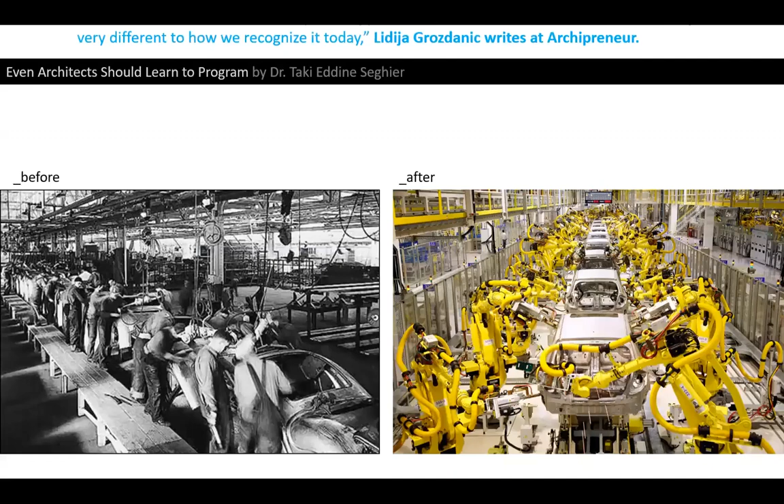And actually, sometimes people think that architecture, as we know it, is likely to disappear, and in the future the role of the architect may be very different from how we recognize it today. Which means we really need to find or update our toolkits in order to be up to date with current technologies. If we see, for example, the car industry - look at how it was before, and look at how it is now.

So basically robots have invaded the factories, and as you can see, we almost cannot see any person here in the current situation in the car industry.

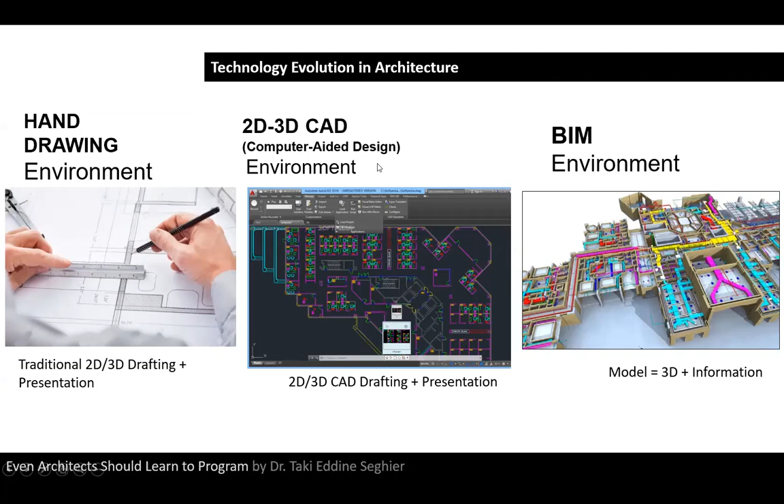Same thing now if we see what is happening in architecture. For example, we started by hand drawings - this is how things looked like - and then AutoCAD, 2D and 3D. And today everybody is talking about BIM, Building Information Modeling. The big difference between, for example, a BIM environment and CAD is information. This means if you have the weapon or the tool to manage this information, you will survive.

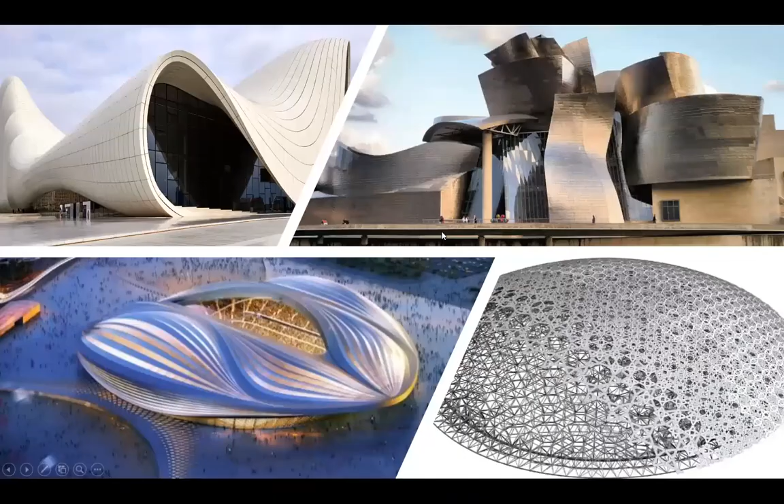All the surroundings, whether it's a robot, video games, or even your air conditioner in your current room, there is always programming. There is a place for everything in nowadays life. Even for architecture, these buildings would never be standing like this, like in these pictures, without programming. So there is always a space where you can apply programming, even in the design process.

This is what we will focus on after that. So I believe if I ask you what architect you would like to be in the future, many would say this guy, Le Corbusier, because he's very known as a very good architect. This is maybe before, but nowadays you have to be like this too. The second half is Bill Gates. So basically you need to think like Bill Gates also. You need these two persons.

So the Corbusier mind in order to think about how to design and everything related to architecture, but in order to embrace the current technologies, you have to think also like this guy, Bill Gates.

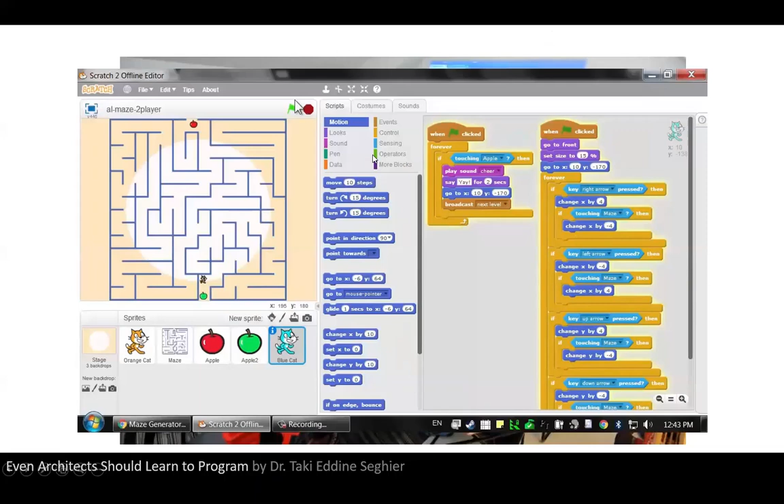Which means it's not only for architects. That's why in some schools you can see kids learning programming. Just for your information, there is already a software called Scratch, developed by MIT, oriented for children to learn programming.

For example, this is a small program developed by a kid. As you can see, the mission is to move this small cat from this green apple to this red apple. So they should develop an algorithm to make this happen, to reach the objective.

Another argument for why programming is important: there is a survey done by Stack Overflow, a very well-known company. They did a survey of 26,000 developers in computer science, and these persons come from 157 countries.

One of the findings: 48% of them are self-taught and without a computer science degree. This is very important. This means if you are an architect and I ask you to learn programming, I'm not asking you to go take a degree in the University of Computer Science.

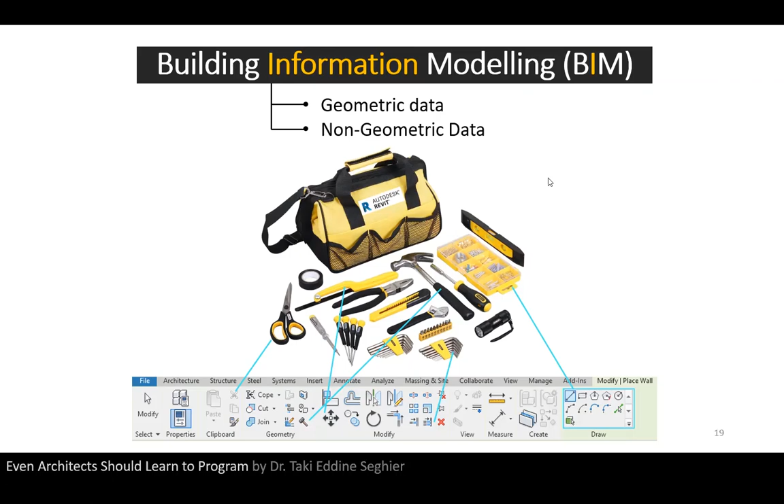It's also important to know the difference between information and data, because it's a bit confusing. We cannot use them interchangeably.

The main difference is that we have data, and in order to get information, you have to process the data. Now how do you process the data? I have an example of what we mean by processing data. For instance, from A in order to go to B, we have data, which is paddy rice, and we want to get information. So basically we need to go through a process.

In the beginning we have paddy rice, we process it through dehusking and parboiling. From husking we get brown rice, then milling, and then white rice. All this process, since it is a process, we call it in computer science an algorithm. So now you know what algorithm means: basically it's a series of instructions that we give to a computer. We have data, and we have objectives in order to get useful data, which is information. So this is what an algorithm is, and now you know the difference between data and information.

In other words, let's say we got that information, which is rice. We can go through another process, apply another algorithm. We take this input, add carrot and other vegetables, slice them, filter out things we don't need, and put them in this cooking recipient, adding variables, even salt, and in the end we get an output which we can eat. So now we've applied an algorithm. This is an algorithm - I know sometimes students get scared when you say algorithm, thinking you're talking about rocket science, but an algorithm is a very simple thing: a series of instructions that we give to the computer.

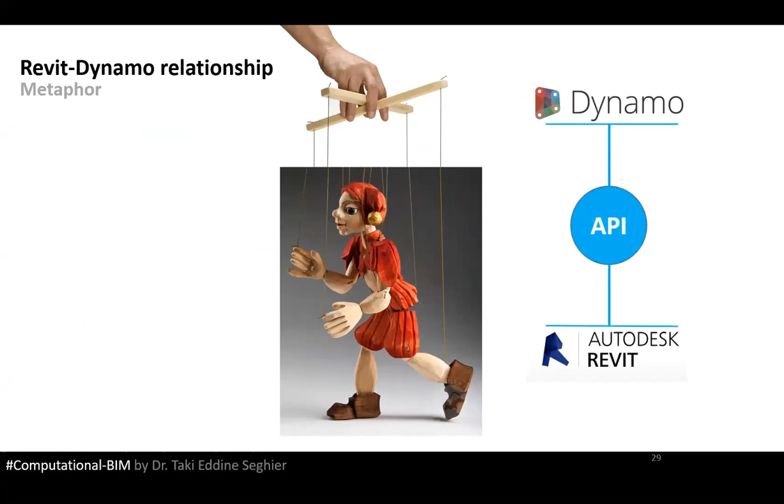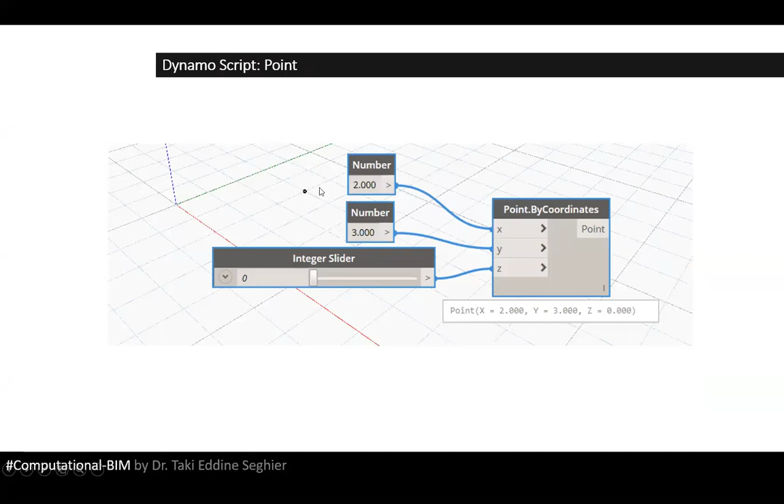Remember, this Dynamo is connected with Revit. So this means anything you do in Dynamo will happen in Revit also.

So this is another example, just a Dynamo script which will create a line for you. These are very basic things, of course. A line needs minimum 2 points, so we call it line by start point, end point. We have start point here and end point here. We call it point by coordinates here and here. And as you can see now, these points have been created.

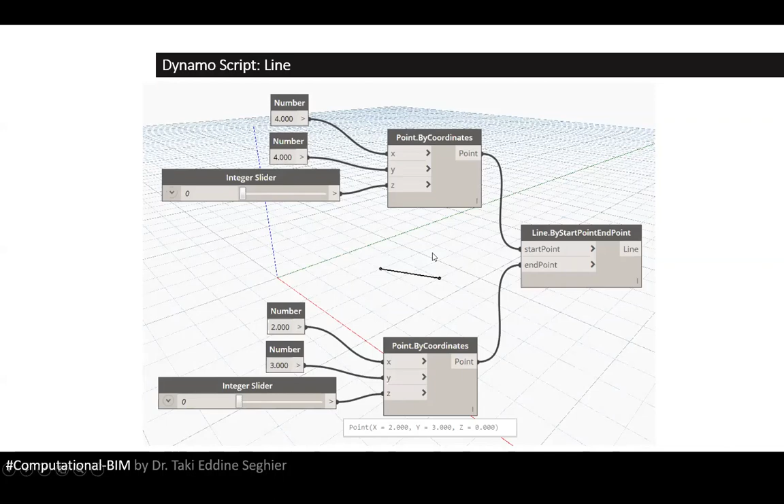If I change the Z, for example, you will see this point go up. Basically, this is how programming works. Even in Grasshopper, it's the same concept actually.

Now, before I start showing you the examples or case studies of how to apply this in architecture, in your projects, I will make sure that you know the advantages. By using programming, either visual programming or text-based programming, we can automate repetitive tasks. For example, if you go to the industry and start using Revit, you will see many tasks are very boring. You spend too much time doing them, and it's like you are repeating it. So you start thinking, why can't we develop something so I can click once and everything will be done, instead of keeping on renaming and all these kinds of issues.

Programming also helps you create design options, many design options. In design studio, usually you just create one design and take it to your lecturer and tell him this is what I did. But possibly it's not the best design option. There is a high chance it's not the best option you have selected, because there are thousands or unlimited options of material, unlimited options of shades, maybe orientation also, many options. So it's really hard as a human being to select options like this. We need this kind of programming.

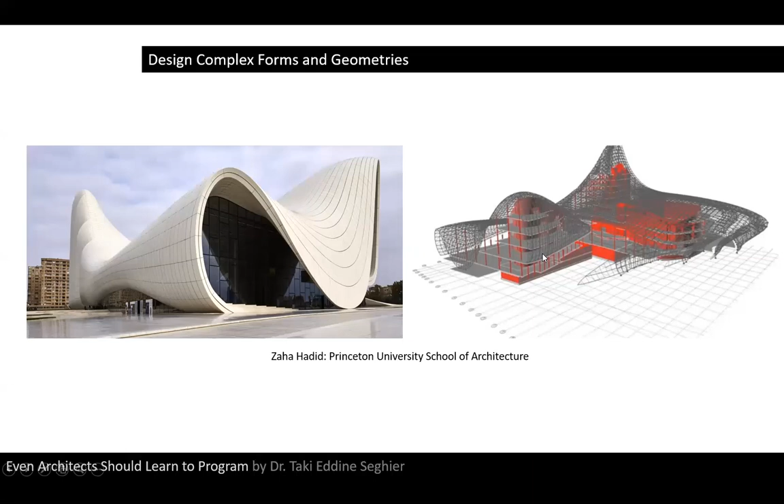We need to know the coordination of each panel. As you can see here, they are very curvilinear geometry. So if you come to build this kind of structure, you will find it very challenging. Without programming tools, you will not be able to make it.

Another application of programming: usually we need to simulate what we call a kinetic or dynamic facade, simulating its movement and how it adapts. I think you know this project, Al-Bahr Towers in Dubai, where the facade opens and closes depending on the sun position and the thermal comfort inside the building.

There are sensors connected with the pattern in the facade, which will open and close depending on variables like thermal temperature inside and solar radiation. So if the sun is behind, it's okay, we can open it. The sensor can detect there is no sun, so it will be open.

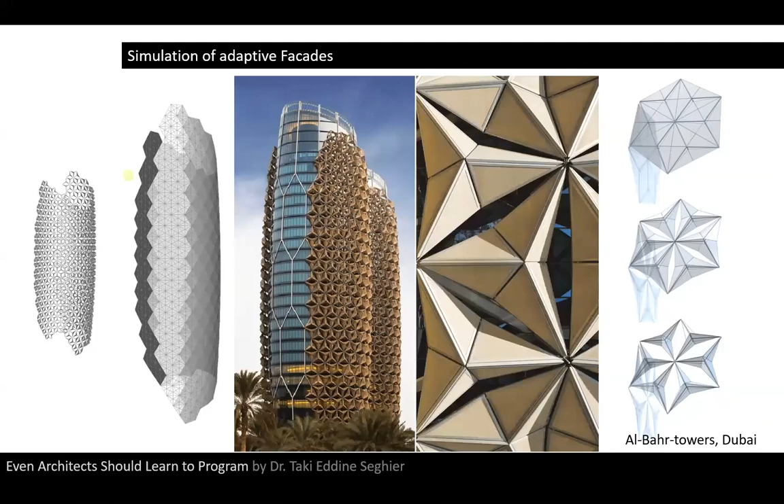These kinds of things we need to model. If we are in the design stage, we have to model them using computer software and simulate this movement. We can do it actually using Revit and Dynamo. There is a whole workflow, and there are videos on YouTube on how to model these adaptive facades.

You can connect the position of the sun with the movement, whether it opens or closes, as you can see here. So it's like we do a simulation. If you bring this to your lecturer and show him, look, when the sun is here, it will close, it will be a very good argument in your design studio.

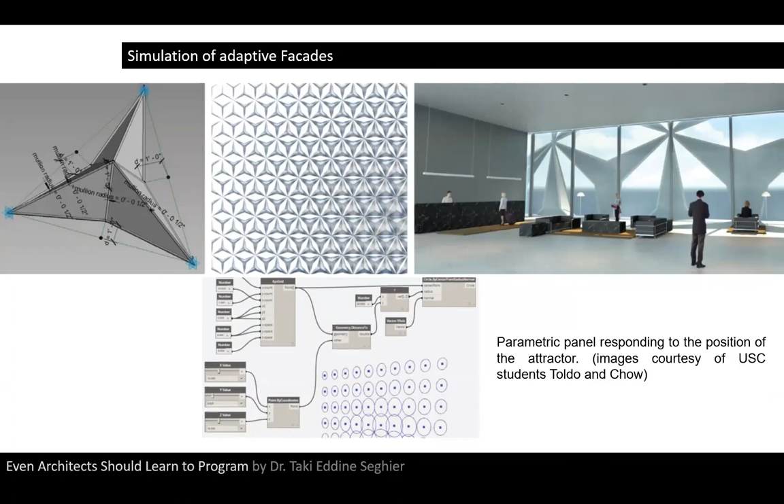It's not just saying, look, the sun is here, and I designed my pattern to be closed and open, without bringing enough proof. But if you simulate it, it's a really strong argument for your design.

Another important thing we can do using these tools is generate what we call random patterns. Nowadays we have many projects with randomized patterns in the facade, like this one, or this tall building with these white panels. They are random, and there are good workflows in programming to make these randomized patterns, so you can test many patterns.

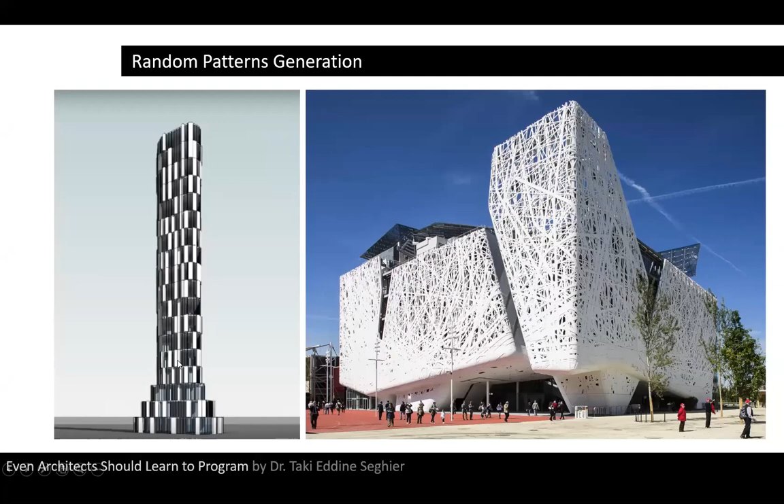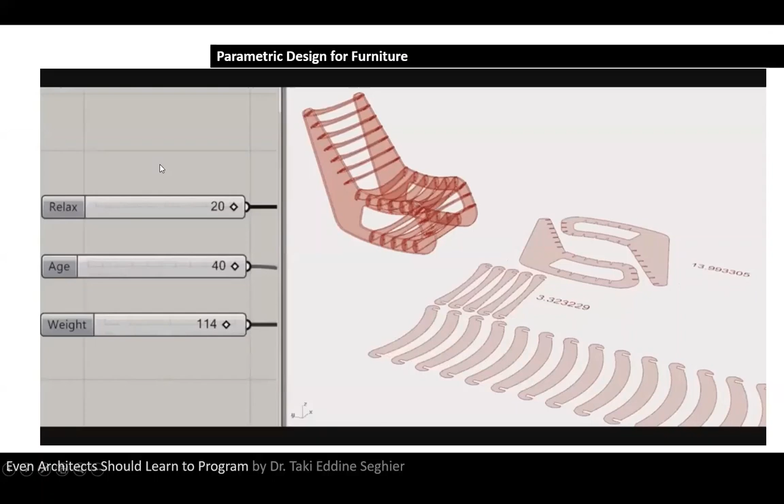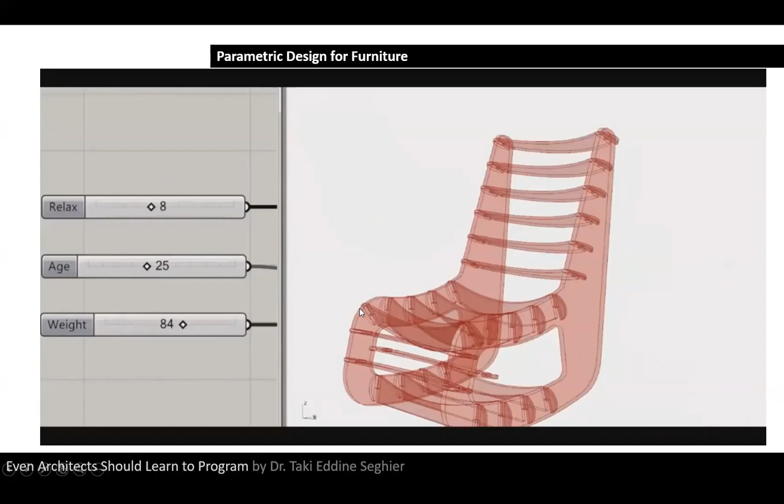It's also very good to use these tools for parametric modeling, like here in Grasshopper. For example, this is for furniture, but we can apply it also for a building. As you can see, we created parameters such as relax, age, and weight. Since things are parametric, we can experience different options of this design.

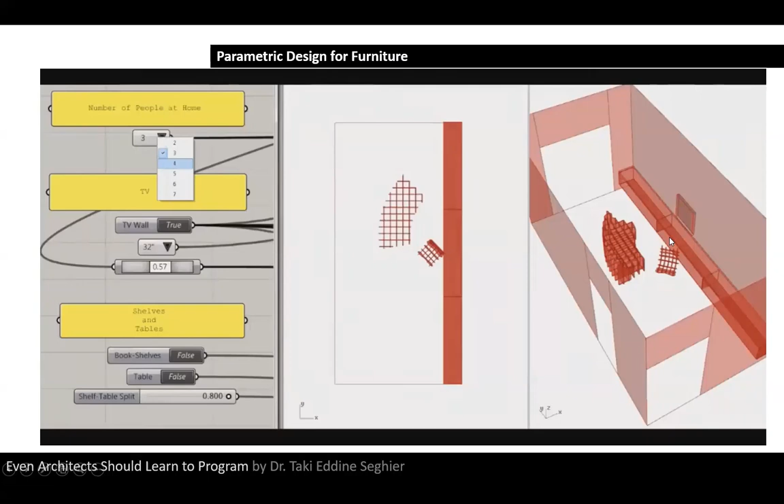This is another example, a room. If things are parametric, they should also be objective. Here we don't have much space, so we're trying to select the optimum size of the furniture.

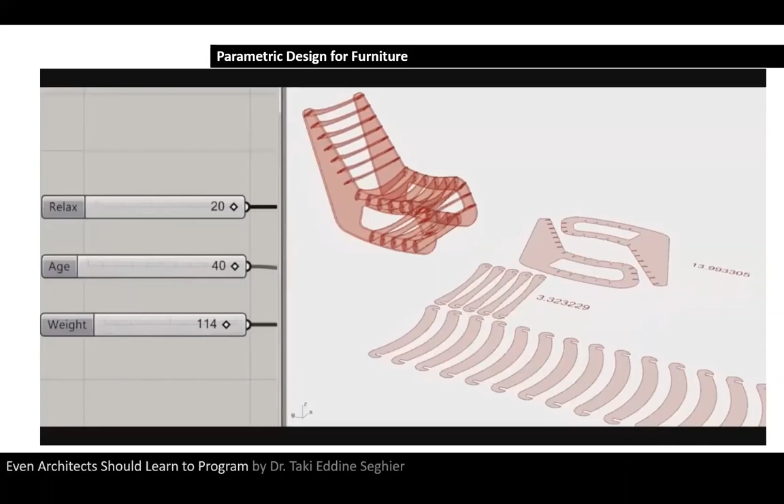Of course, for structural design as well, as you can see, this one is Revit, and this structure has been designed or modeled using Dynamo. It helps a lot. Same thing here, we have structures also.

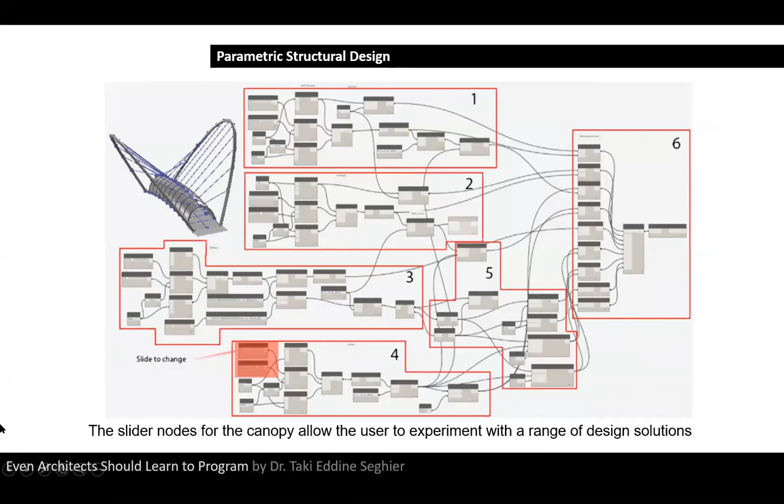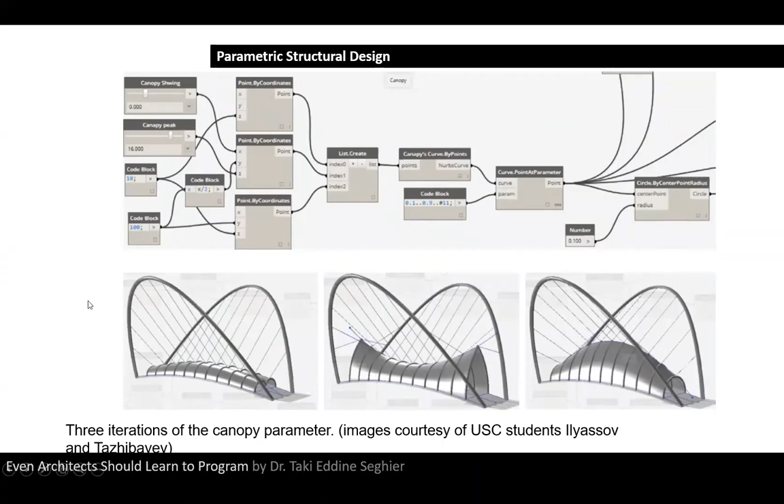It's a parametric structure, which means we can experiment with many shapes, testing different kinds of shapes depending on the parameters we've selected, where the structure will be able to move. As you can see, it's the same structure, but here there's a variable we can move and see if it is interesting or not, depending on our objectives.

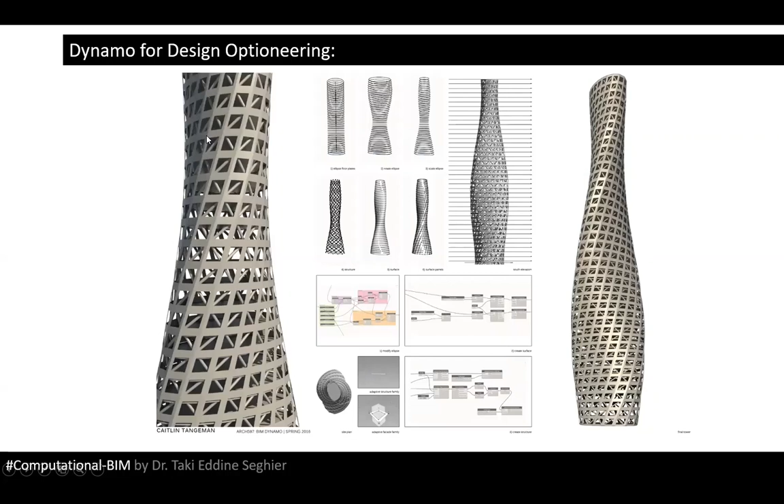Same story. This one is related to structural designs, and we're trying to create different options using visual programming software. Of course, we can do this using text-based programming, but architects are usually encouraged to use visual programming, especially in the beginning, because text-based programming is a little bit complicated. Visual programming is more friendly for the user.

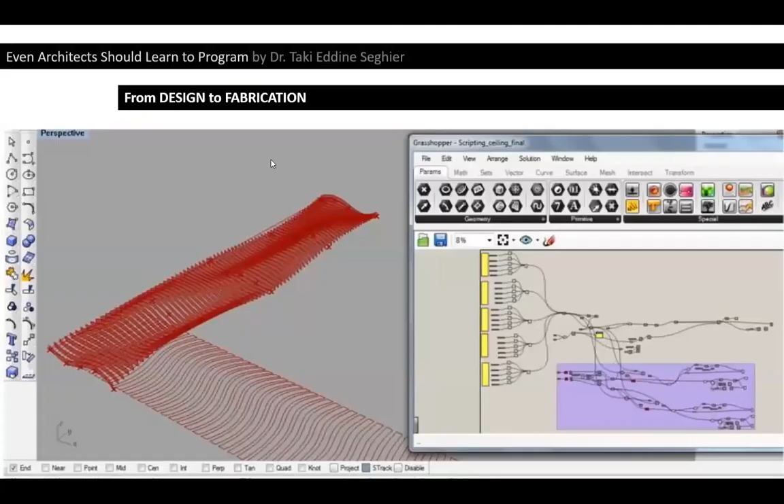Another thing, it helps for fabrication. For example, this kind of ceiling, which is a sculpture connected to the ceiling, is real here. They made it using Rhinoceros, and as you can see, this is Grasshopper, the script which modeled it.

So the advantage when we model it using Grasshopper is that we get this curvilinear result, as you can see. Almost no element is similar to the other. They are very different, which means when we come to produce this, if you do it in SketchUp, we'll find difficulties cutting, slicing, and manufacturing them.

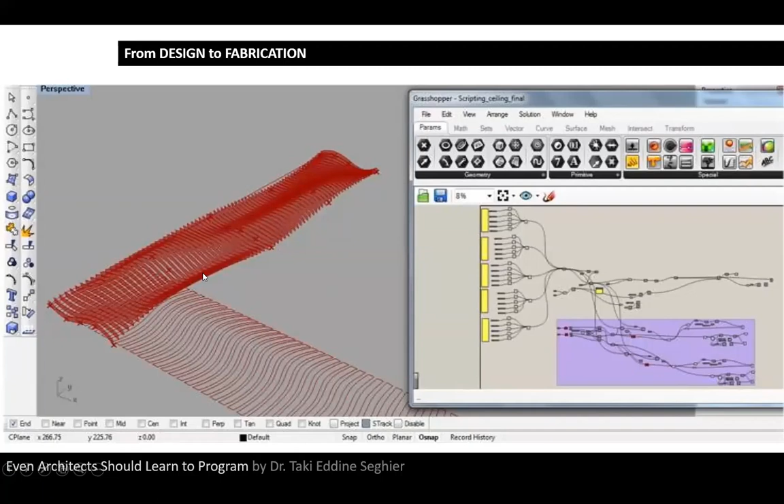But when we use visual programming like Grasshopper, we will be able to get exact measurements and an ID for each element, ready to be printed or cut. After that, we just need to install them very precisely, and we'll get the good result we were hoping to see.

His project is a big one, an arena. He has auditoriums, and his idea was that these seatings should rotate. We should not make two separate seatings, one for the arena and one for the auditorium. Since they play basketball on weekends, the seating will be one way; if other days they need the auditorium, they can rotate.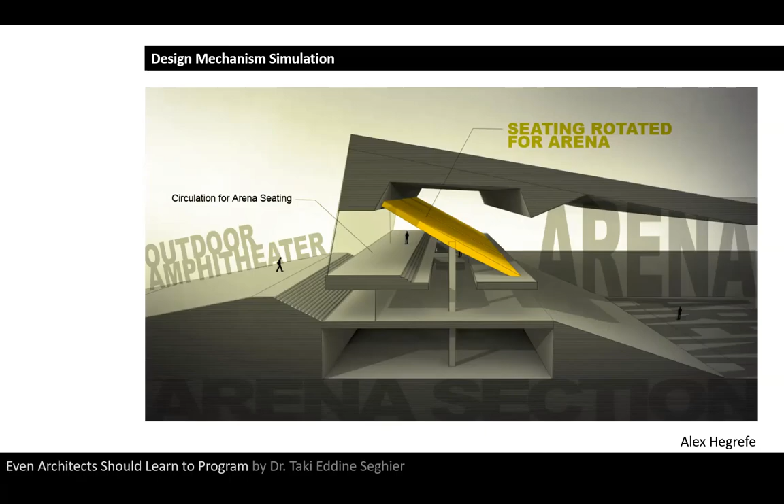Now, if you don't know programming, you will stop here and not go deeper into your idea. But when you know programming, you will be able to simulate the mechanism of your seating, as proposed. He's explaining the structure here, different components, and how the mechanism will rotate to make it possible, as you can see rotated this way.

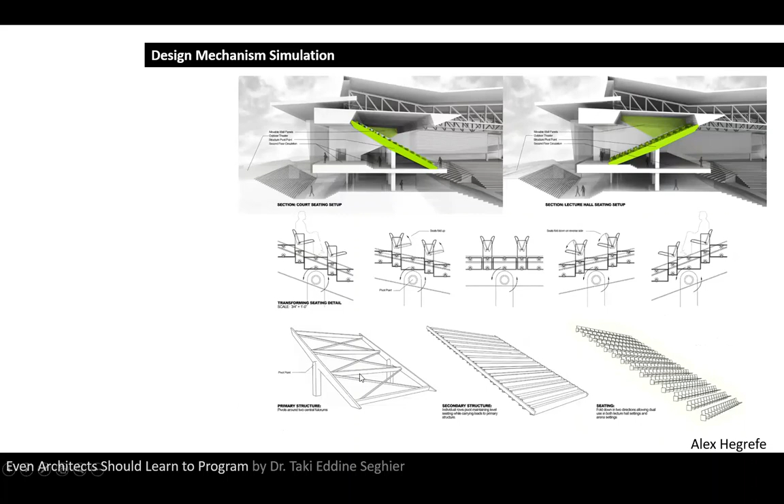And of course, there is a script. He's showing that things are precise, not just artistic. If you zoom here, you will see the rotation because it's a variable, it's parametric. So as you start moving the slider here, you will see that the seatings are moving, rotating.

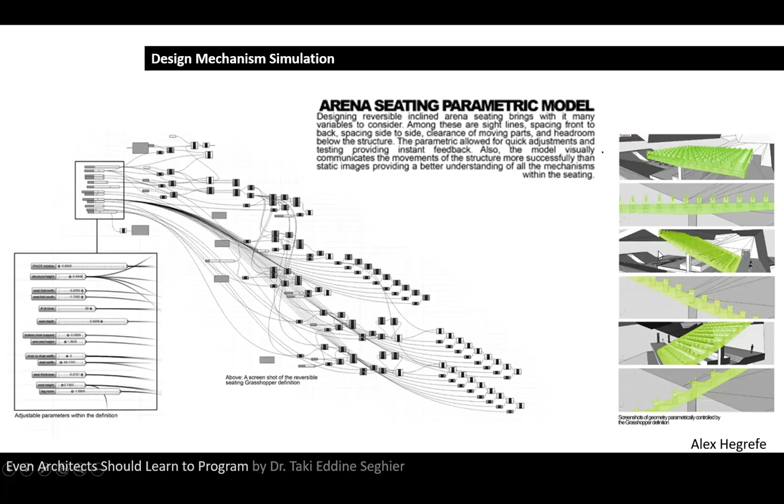This is the same student's work. For example, here he has a louver system in the facade, and it's going along a very long facade, covering it. But the issue is that this louver sometimes covers a corridor, sometimes a cafeteria, sometimes an auditorium, another cafeteria.

His idea was to protect the spaces and design his louver depending on the solar radiation and the function of the space, because we don't need solar radiation in the auditorium, for example. We need it here, maybe it's okay since it's a corridor, but not here. So we need an idea to make a complete louver parametrically, where we can experience changing the openings of the louver system.

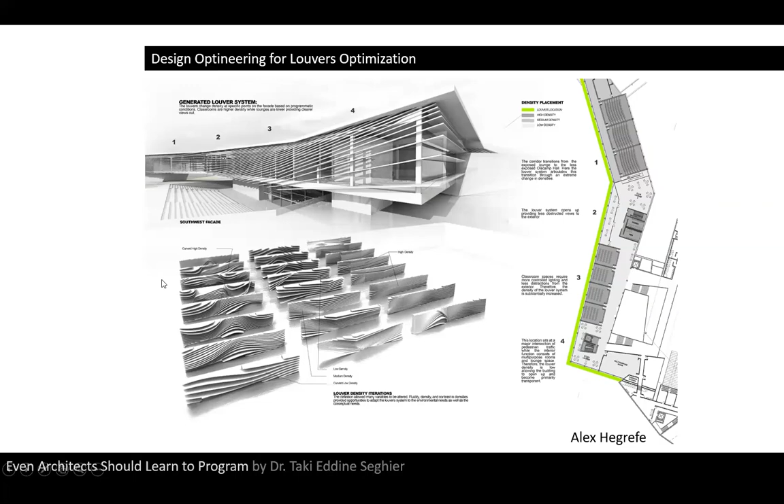As you can see, he has created many patterns of this louver system, and he used Grasshopper, a visual programming tool. The process here uses what they call an attractor point, but no need to go through the details for now.

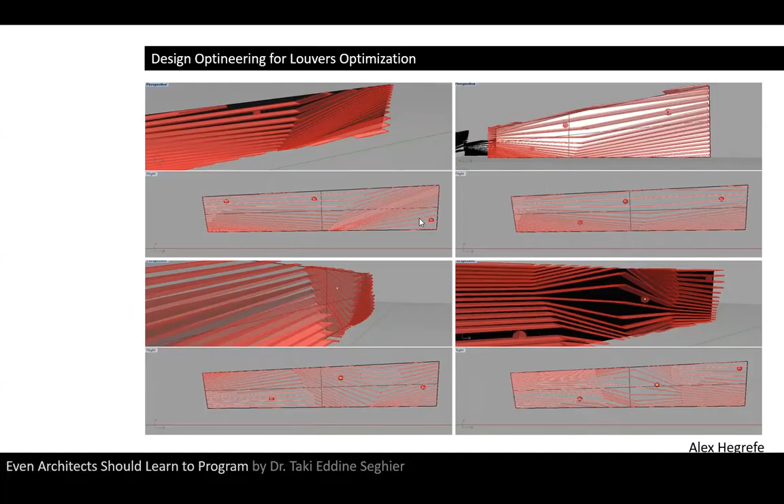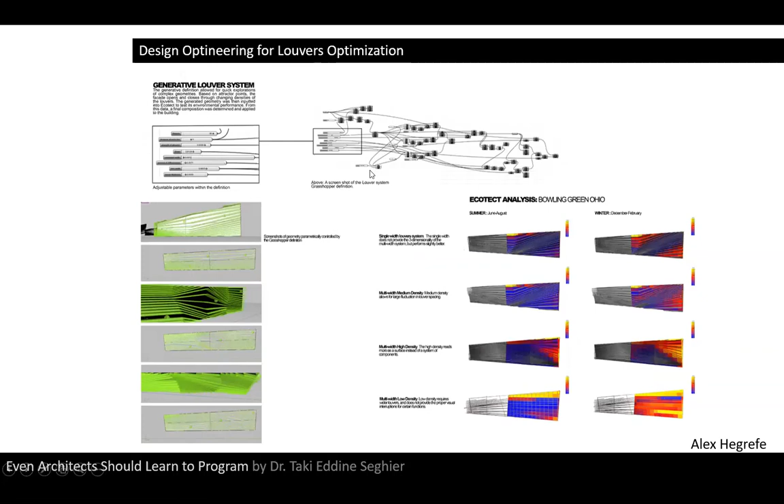Since Grasshopper can be connected to Ecotect, a simulation software for environmental design, he was able to perform radiation simulations for each elevation, and see if the radiation is too high or too low in some areas. So he has a kind of rational thinking to argue about his design using this technology. By the way, he got the best project among his student semester or year.

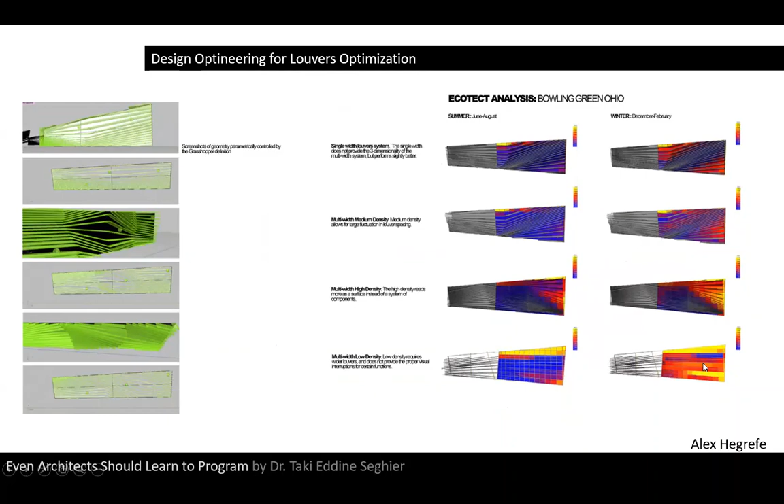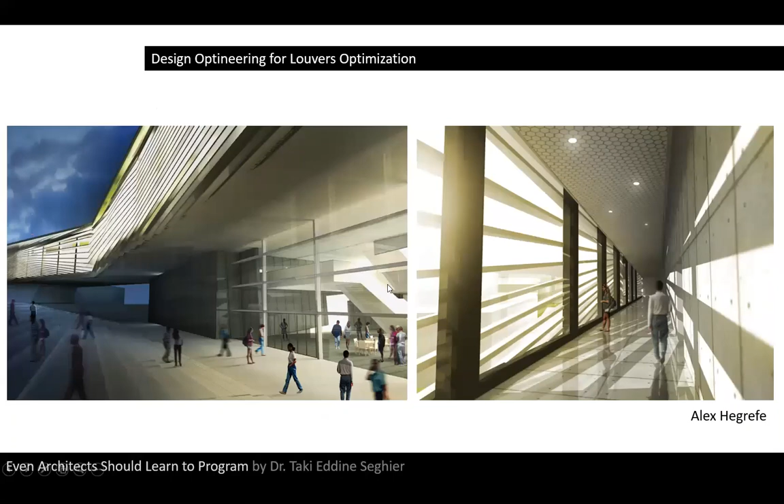So this is continued. He did Ecotect analysis for summer and winter, as you can see here, regarding the radiation for each pattern. And this is the end of his rendering. After that, he selected the best one, which is normally this kind of pattern. He has strong arguments why this is the best one, not just selecting and drawing. He has arguments even about the selection of the louver, and of course, thanks to programming, otherwise he would not be able to get this kind of results and workflow.

This is another script developed by another student. This script is meant to optimize thermal and daylighting of the interior space. As you can see, there are many kinds of what we call nodes, these ones. So the objective is to optimize, as I mentioned, the complex thermal and daylighting.

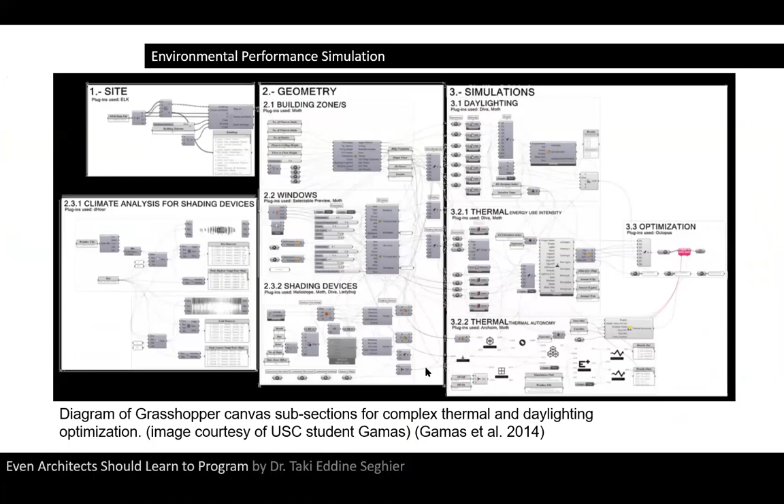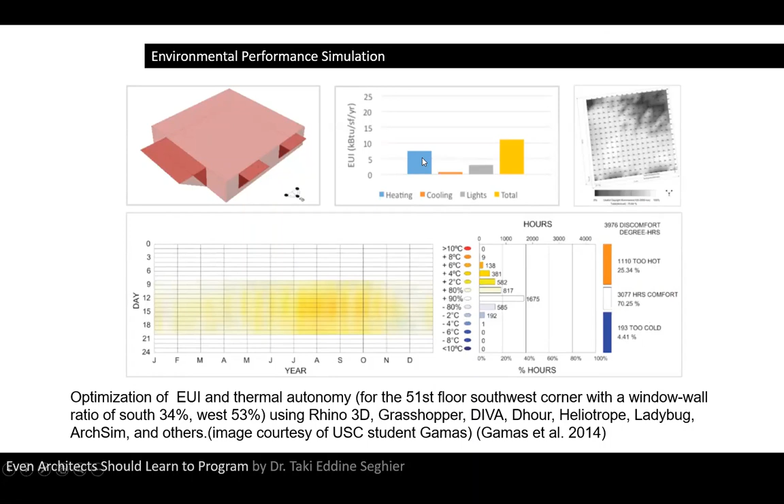Okay, this is another example. It has been done using Grasshopper. It's the optimization of EUI, which is energy use intensity, and thermal autonomy. They use this visual programming to optimize these. As you can see, you can get results, and after that you can draw a diagram of the performance of the building. All these results are actually coming from this visual programming tools.

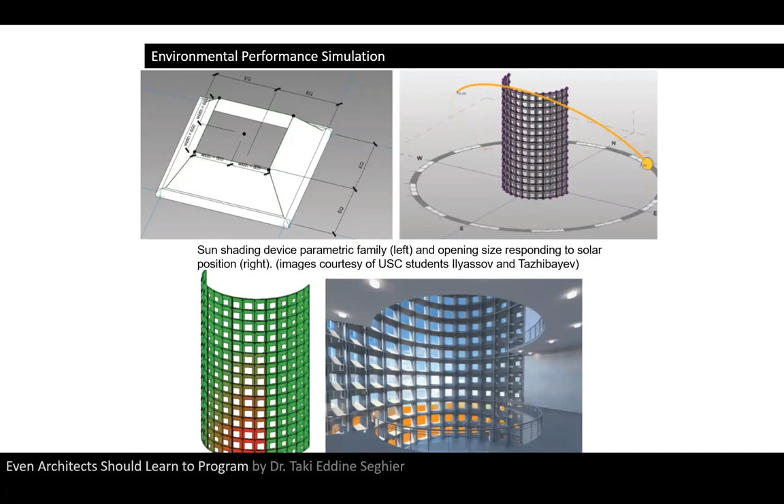This is another example where we use Revit and Dynamo. We developed a kind of pattern for the facade, and we repeated the pattern. This pattern, since there is the sun, should open and close depending on the position of the sun. As you can see here, it's open a little bit, and here it's more open, maybe because the sun is on the other side. So it's important to do simulation. When you have an idea, especially related to dynamic facades, you need to approve it. Maybe you will not need to develop a physical model, but digitally you can approve it. You can do simulation for the mechanism.

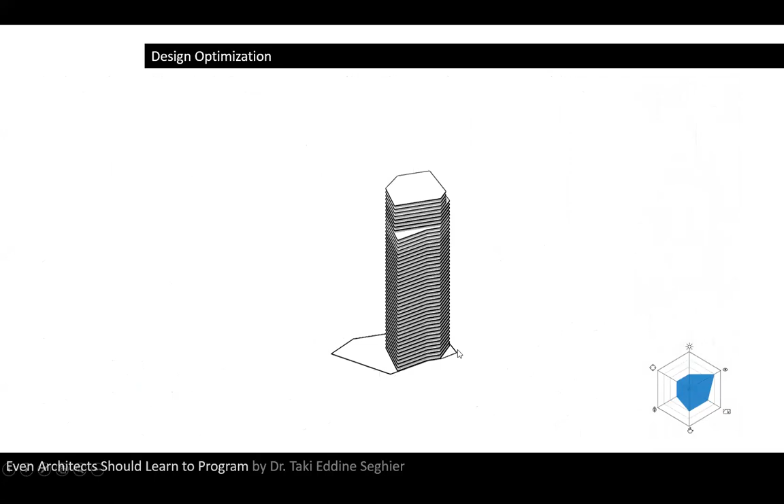Nowadays there's what you call optimization. In optimization, we use algorithms, and there are many sophisticated algorithms, until we can just give some data to the software, to the algorithm, and the software and algorithm will give you the best design in terms of, for example, daylighting, or cost, or both cost and daylighting, and even energy. And you will see something like this. Because your initial model is parametric, when you run the software, it will test each possibility or option, and in the end it will show you, look, this is the best option, because it doesn't cost too much, and regarding daylighting it will be perfect, and maybe even the energy consumption will be very low. So you have to select this option.

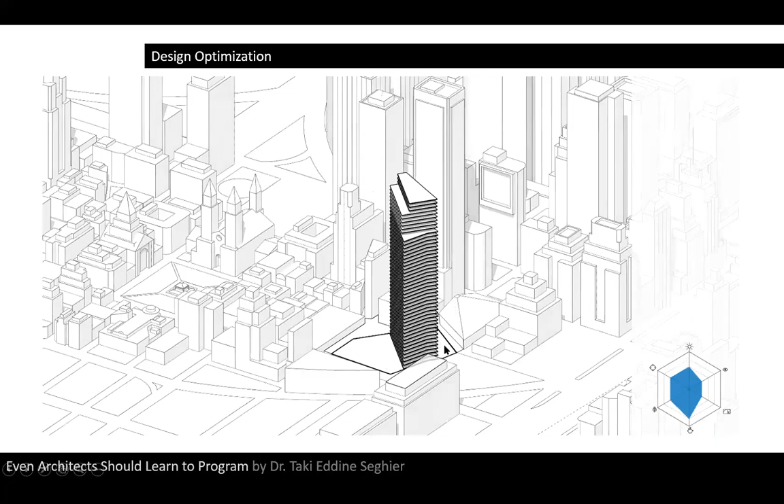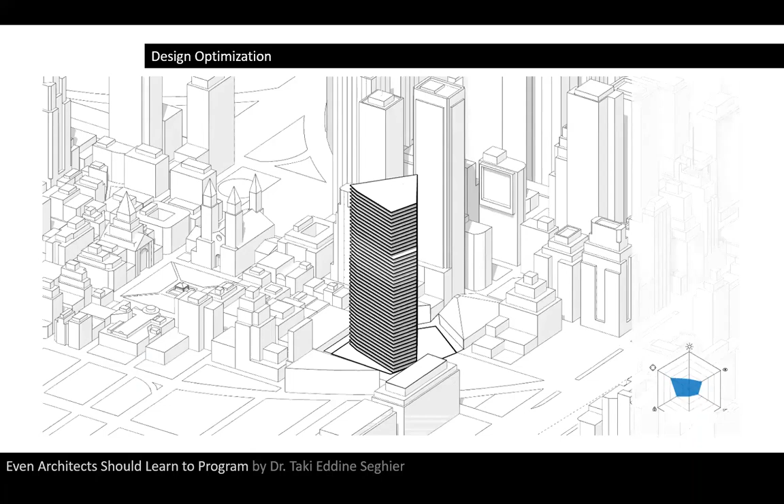So as you can see, digital developments are really, sometimes they are even scary, because you may think maybe we will not even need architects to do this, because software can take decisions better than us. They can test many options and give you the best one. But anyway, this is another discussion.

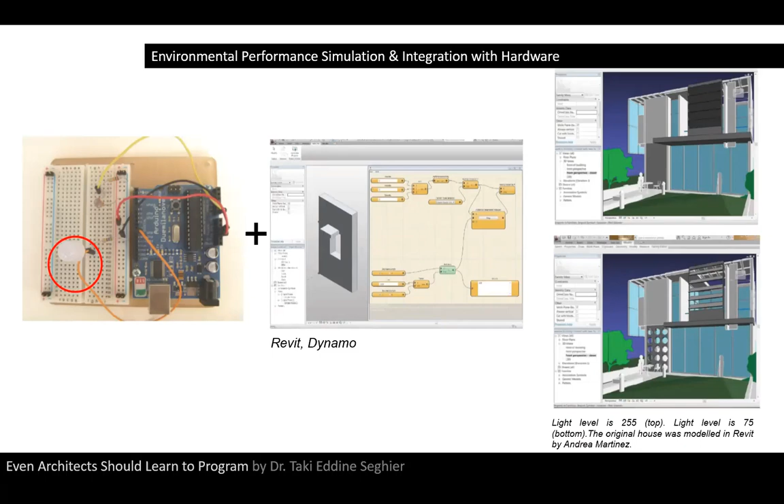One of the very advanced exercises we can use through visual programming: nowadays we can integrate hardware with visual programming. For example, this is Dynamo. Let's say we have a window and a shading device, and this shading device can move, or this opening, as you can see here, is closed and here it's open. Same thing for this louver. There will be a sensor, as you can see here. We call this Arduino, and this Arduino is connected to the Dynamo script that you have developed. For example, when you put your hand on this sensor, which is for lighting, you will see on your computer that they have opened, because they are all connected. So even though the hardware is realistic, under your hand, you will see that when you cover the sensor, these louvers will open. It's like you are giving instructions to the computer from the hardware. So it's very important to know that we can do this even nowadays.

Now I will try to go quickly through some other case studies. Now I will talk about the benefit of Dynamo for data management and automation. Maybe you will not feel the importance of this part until you go into industry and face too many issues when using Revit. You will see many things that are repetitive, and you will see that you are wasting your time.

So perhaps you will need to use Dynamo for this. For example, let's say you have this issue: I ask you the number of the room by floor level. Because now if I see the numbering of this 2D floor, it's saying 08A, 08, and 07.

I ask you, can you make the numbering of the room by floor level and room name? If I give you a table like this, I ask that each room in level 1 should contain a room number like 101, meaning level 1 and room 01, level 1 and room 02. And I give you this, the level 1 current naming.

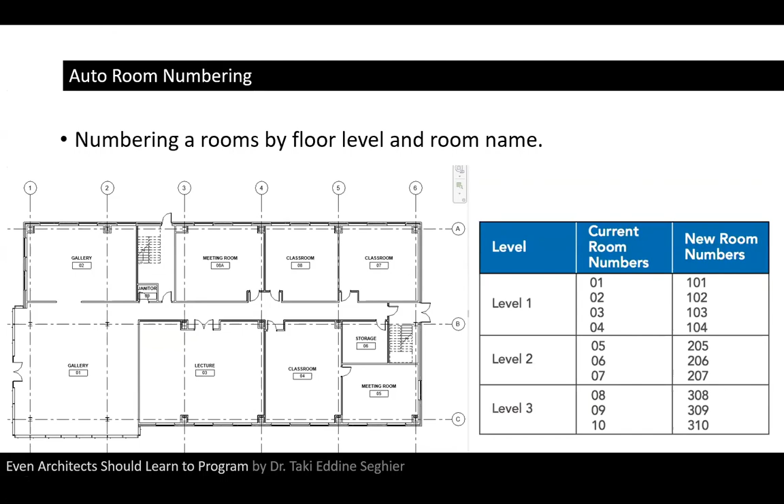As you can see, if you don't use Dynamo, you will go through this naming one by one. So where is room 1? You will make it room 101. 102, you will make it this one, and so on. But if you have Dynamo, you can develop a simple script which will do this in a blink of an eye. You just click and all the naming will be changed automatically. You may not need this currently while studying, but when you go to the industry, you will face this kind of issue, especially when there are too many rooms.

So this is what we call script logic flow. We can apply this to solve that problem. Basically it works like this: we ask Dynamo to gather all room elements, read each room's level name and room number, gather the last character of the level name, join the level number and room number, and write this information back to the room. So this is the script, or algorithm, as I mentioned - an instruction that we give to Revit through Dynamo.

So sometimes, for example, if I give you this project and ask you to rotate these seats 90 degrees, what would you do? If you select all of them and click rotate in Revit, actually all the seats will rotate not on their own axis, but on a specific point. For example, if I click here as the point they rotate around, maybe they will end up outside of the room.

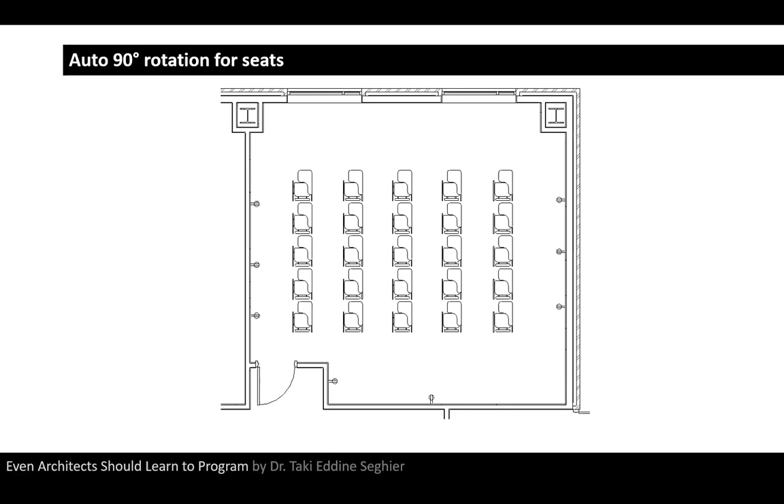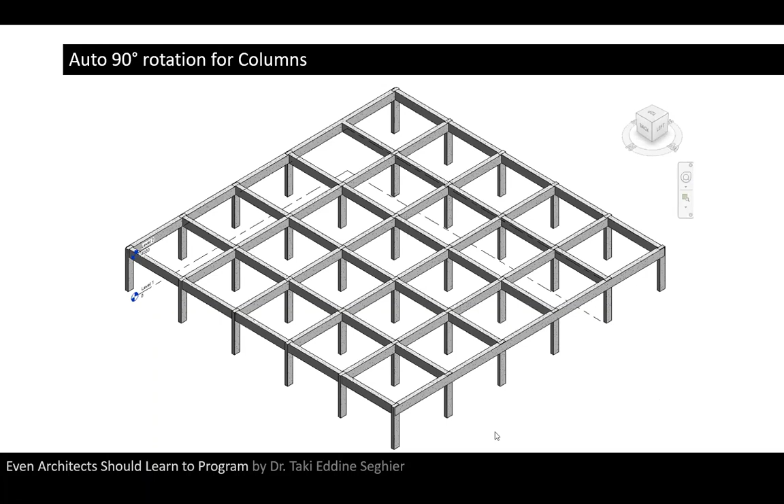So to make this happen properly, we need to develop scripts using Dynamo, and in a blink of an eye we can execute it and see all the seats turned 90 degrees in a few seconds. Same thing with these columns - if I ask you to rotate them using Revit only, you'd have to rotate them one by one, which is time consuming. Imagine you have hundreds or thousands of these columns - it's really time wasting. But if you know how to do programming, you develop a small script, click, and you'll see them rotated automatically.

For example, this is another kind of issue you may face: the International Building Code defines the occupant load as the total number of persons that might occupy a building or portion of it at one time. So the equation is: occupant load equals room area divided by occupant load factor.

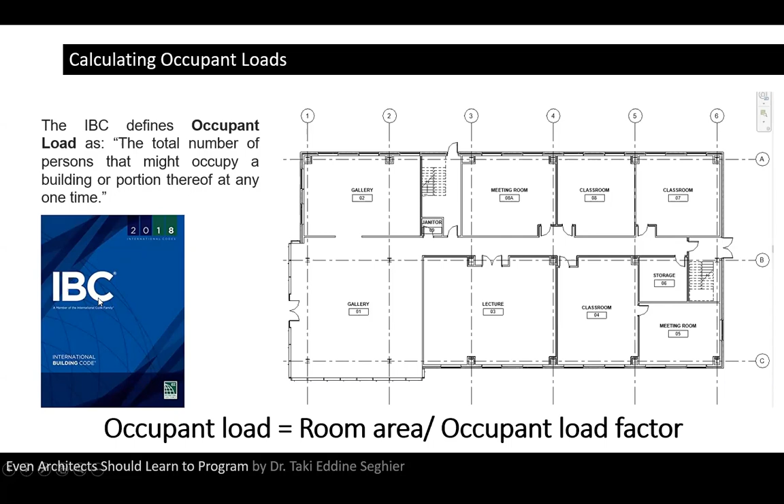This information is already inside the rooms in Revit. If you select a room, you will find this information. So since the code asks you to calculate it, you can develop a small script like this one to calculate it. When you execute it using Dynamo, you automatically get the results, and you won't waste time each time you have a new project - you can always use the same script.

Of course, as I mentioned, you will not face this kind of issue when you are studying. These issues happen when you go into practice - you will see them, especially when you are using Revit.

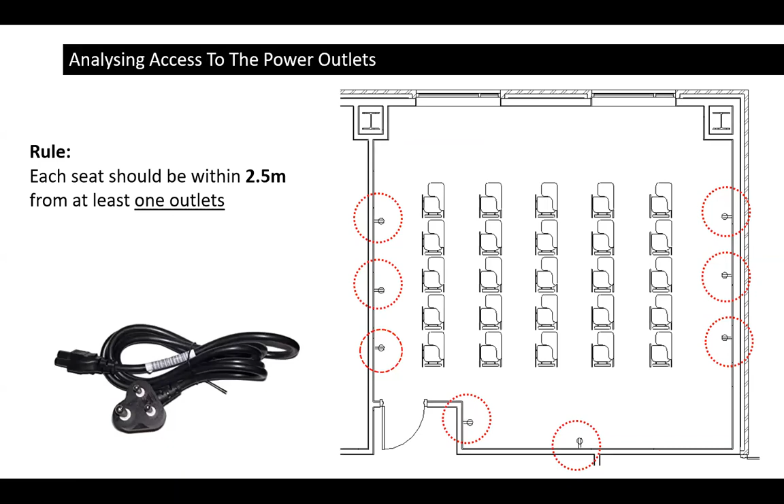Let's say, for example, if I give you this kind of floor plan and I ask you - it's like a small auditorium or class - and according to the standards, each seat should be within 2.5 meters from at least one outlet. How can you prove or make sure that this rule is applied? It's very hard to do manually. Maybe you'll just start assuming, but when it comes to regulation, there should be no assumption. Using Dynamo, there's a very good workflow for this. We can apply this workflow and check and make the seating which doesn't respect that rule show as red, for example. So you can develop your own software to help you.

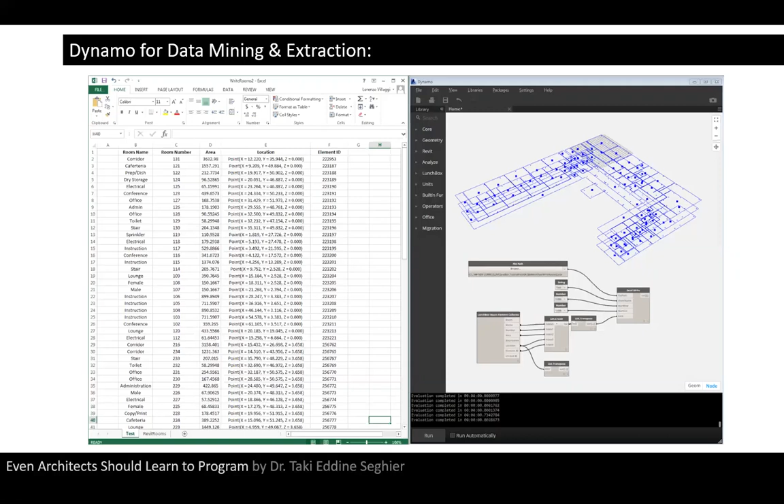Another thing we can use Dynamo for is what we call data mining and extraction. Because when we have a BIM model, there is too much information. Sometimes we need specific information, so we need to extract it. We can extract it using Dynamo if we wish, and of course send it to Excel and all these things. This is another example.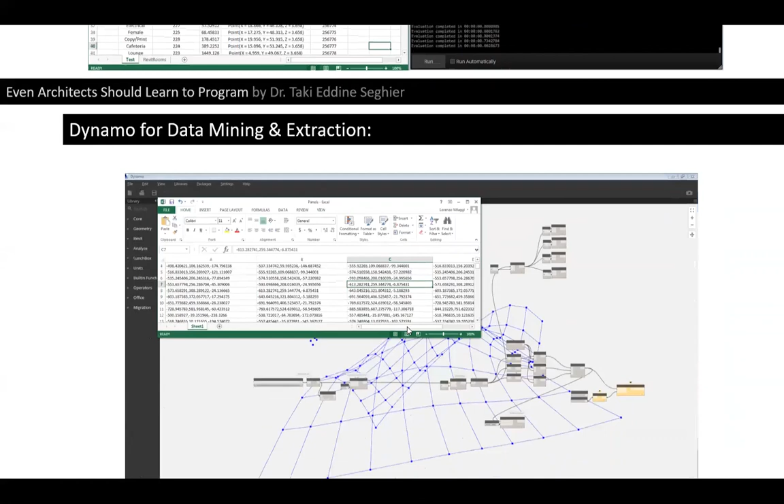Okay, so this is the last part - programming for architectural research. As I mentioned, this part is more for those who want maybe in the future to pursue a master's by research or PhD by research. The next slides are from my PhD thesis, and because I used Dynamo, I'll try to explain roughly. If you understand the big idea, that's already good enough.

So what we did in my PhD - one part of it - we developed a kind of tool using Dynamo scripting. I was in architecture, by the way, so I'm not a computer scientist - no, I'm just like you. So we developed a tool which is able to automate the assessment or calculation of something called OTTV, overall thermal transfer value.

Just briefly, overall thermal transfer value is like a metric we use to understand how much heat gain will enter the building through the whole building envelope.

That's it. And currently, they're not using Dynamo for this - they do the calculation manually, and there's too much paperwork. Sometimes it's complex, mistakes can happen, and every time, it's time consuming.

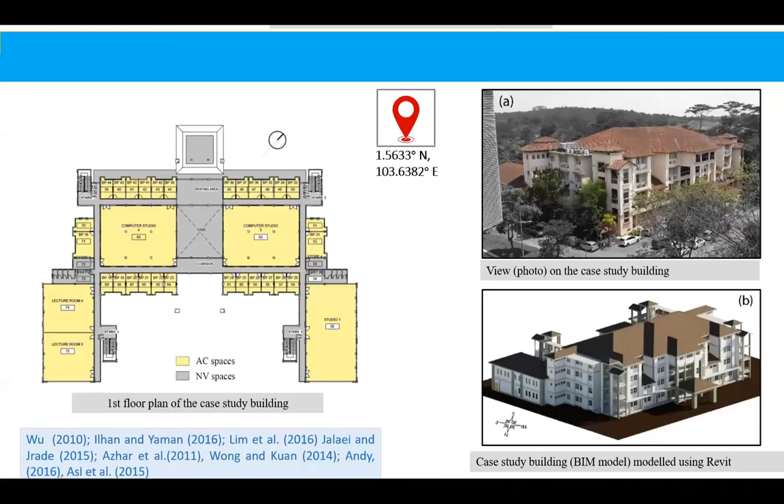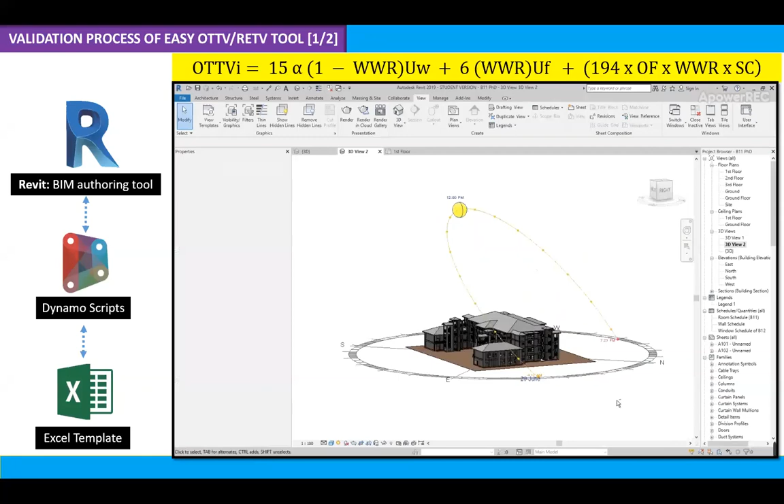And we applied our script, because in research you have to test what you develop - you test it on a case study and prove that it works. This is a little video about the case study. Basically this is the case study in Revit - it's an office building - and this is the Excel sheet that we created.

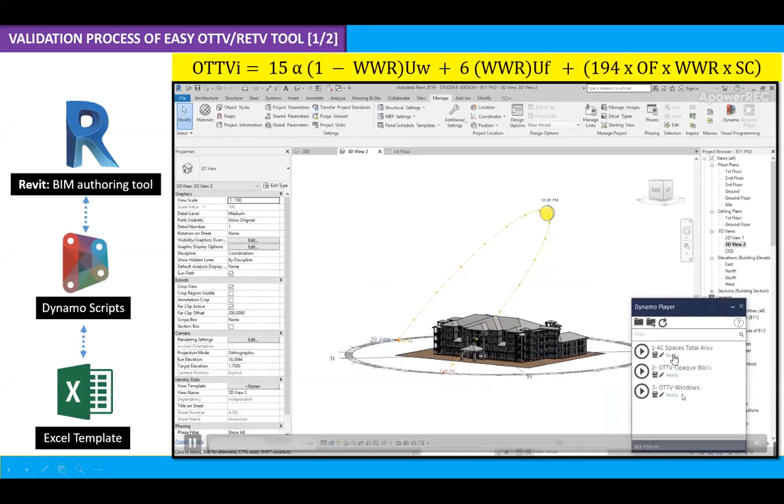As you can see, this Excel sheet is ready to host some data that we will extract from this BIM model. Now I will execute the Dynamo scripts - this thing we call Dynamo Player, it's the same as Dynamo. This is the first script, as I mentioned there are two. All this script does is extract very important information that we can use to calculate this OTTV, overall thermal transfer value. This script is for walls.

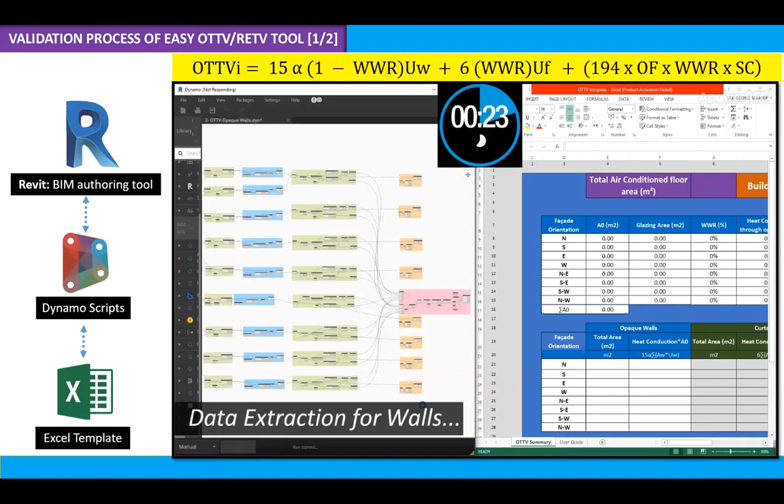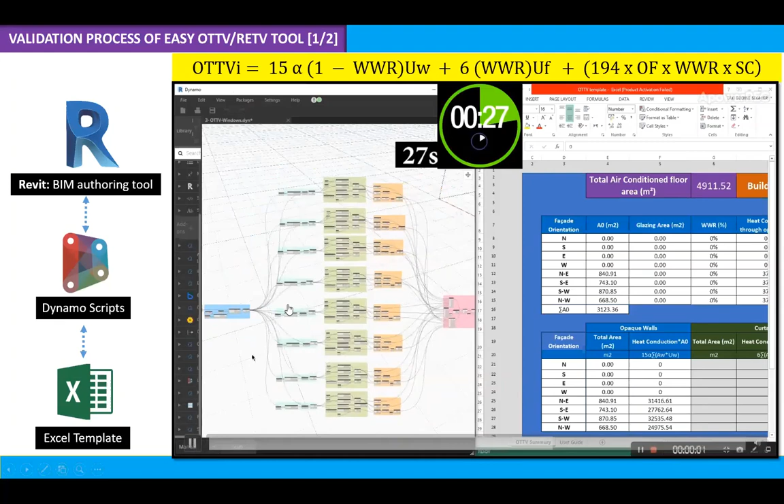I also don't really know too much about text-based programming, but with this one I learned Dynamo and I know Python regarding text-based programming. So now, as you can see, I'm counting how many seconds it will take to extract the information. Remember, before, I mentioned this kind of thing can take weeks. But now, since I developed this script, it will do things automatically. I think it's about 33 seconds - it will finish the process. Okay, 27 - already, as you can see, I got the information here. This information is automatically coming from Revit through the Dynamo script, because Dynamo is connected to Revit, if you remember.

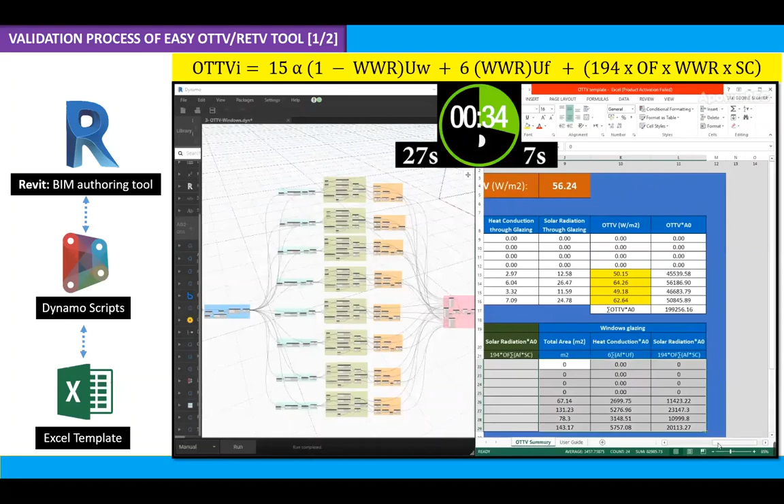Now I still need to execute the second script, which is for windows - I need to get the information of windows. Of course, all this script has been developed already, and as you can see, very quickly we got the information automatically without manual calculations. So basically, this is the OTTV value of this building. As you can see, we did this in a few seconds, and usually it takes weeks to get it.

And after that, these things are related to research, so we compare it to manual calculations, etc.

In another project, this one is a research project, we tried to integrate optimization algorithms in the same workflow. So instead of calculating this OTTV, we tried to optimize, and we wanted the algorithm to give us the best option automatically, not us to select this is the best wall to use here or this is the best window. We wanted to use an algorithm in order to give us the best option.

Of course, when we use an algorithm, we get the best option in very short time. So there is no headache, there is no too much paperwork. Everything is automated, and actually the industry is going to this kind of technology. That's why the title: even architects should learn to program, or how to program.

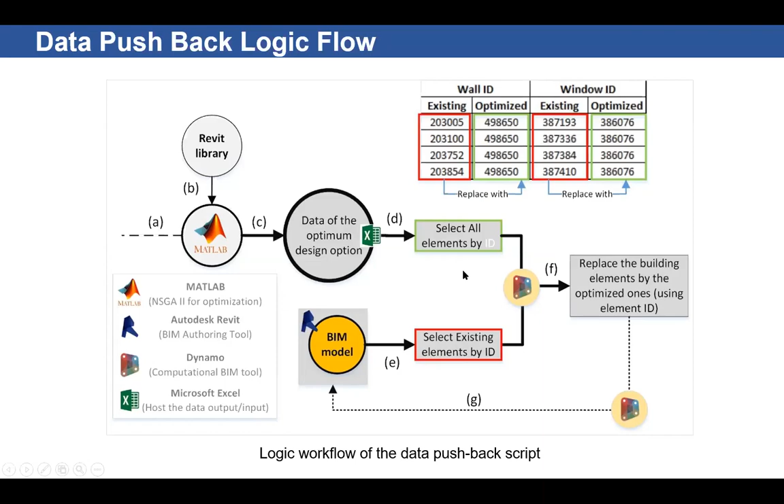This is the workflow of the script, how it will work, how it will extract the data. This is the workflow, how to push back the data to the model in order to update the optimized result. And after that, these are the kind of results that we got.

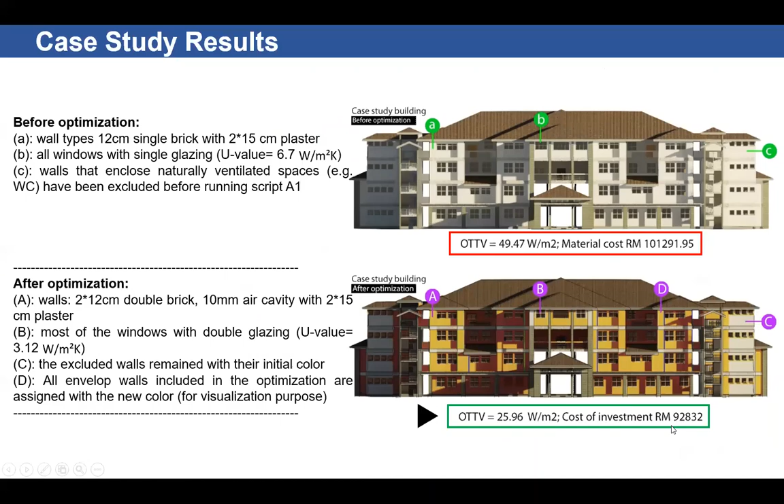We were able to reduce the value of this OTTV from 50, which is too high actually, to 25.96. And of course, there will be a benefit in terms of cost also. We can calculate even the benefit, or how much cost we need to invest to get these results. These kind of things are very important in research.

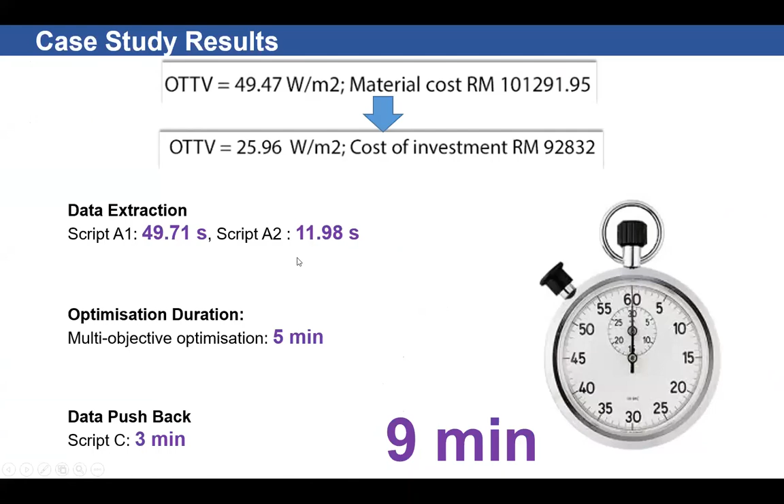And this is the overall, like, things related to the speed. As you can see, basically the whole workflow took only 9 minutes.

I know some may be wondering from where to start. As I mentioned, I think as architects we really need to start using Dynamo and Grasshopper. We need to learn them. If you ask me what is the difference between Dynamo and Grasshopper, you know they are from different companies, but Dynamo, in my opinion, is better for data management, like because it's connected to Revit, and Revit is a BIM software. So it's very flexible in terms of data management, how to extract data, how to automate repetitive tasks. Generally, these things you will need them in the practice, actually.

There is, of course, the part where you can model complex geometries, etc. But I think Grasshopper is better to model these complex geometries. And another advantage of Grasshopper is that you can do environmental simulations, too many types of environmental simulation, lighting, solar analysis, etc. You can do them here.

Now, it would be good also to learn Python, because it's very easy and you can do complex forms, and it's integrated with all the software. In the future, you will see that in practice, many things regarding Revit are repetitive. If you wanted to automate tasks, and if you know this language, you will be able to develop Revit macros. It's like small software integrated, or plugins integrated with Revit. And many people develop this software and they are doing business actually with them, not only developing for yourself. You can even make a startup.

Okay, good question anyway. As I mentioned, you have to understand that programming is not meant to be difficult. You can learn programming for the very simple thing, which is to make you think better. Because if you learn programming, you will see that you can think in a more systematic way. So this is already one very big advantage for everybody, not only for architects.

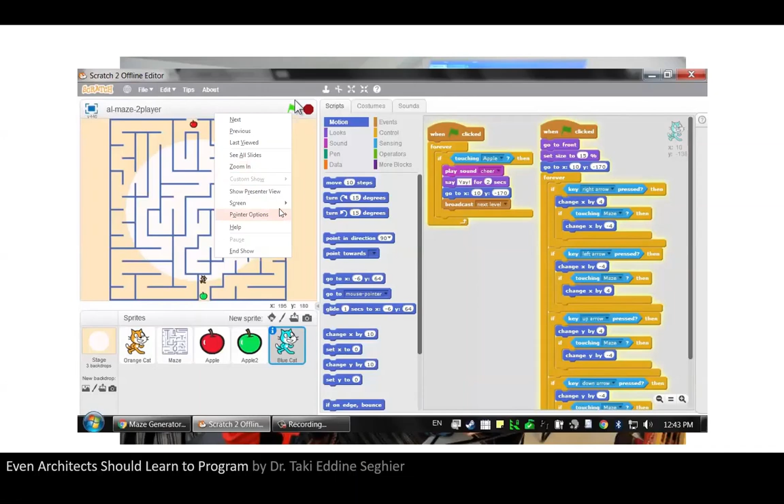I have a question. Because my friend, she's doing coding, she's a computer science student. She talks about programming languages. So what's the difference? Because I was a bit confused about, like, when you talked about script programming, and then there's such as the visual programming.